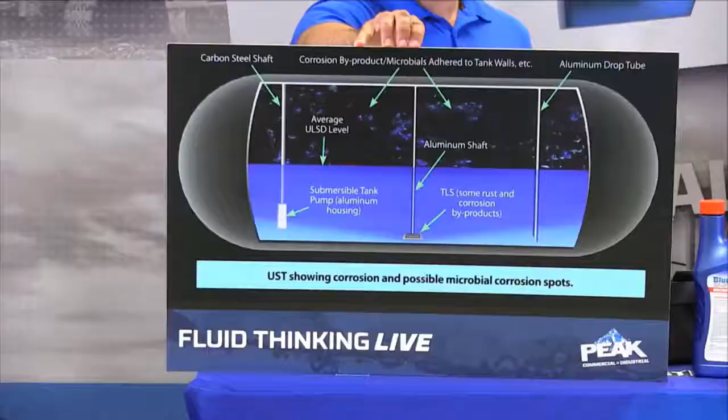Why don't we grab that picture of the tank, and our camera guy will focus in on this diagram, which shows an underground storage tank. You can see there's airspace in the black right above, and this is the fuel.

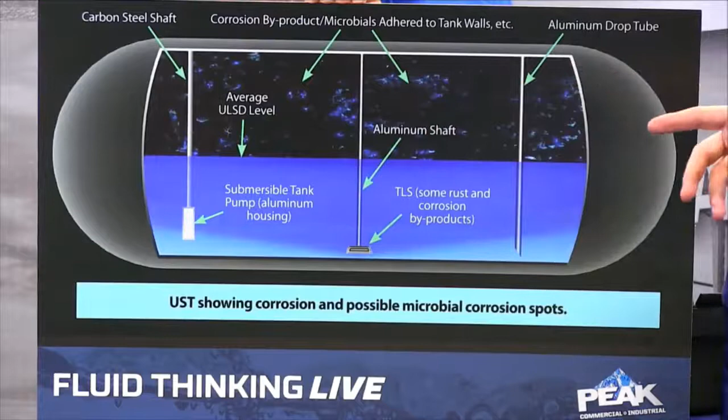Now, there's a lot of different places where water can enter the tank. It could come through the different fill points on an underground storage tank. If there's any seal leaks or cracks around there, that water can seep through as well.

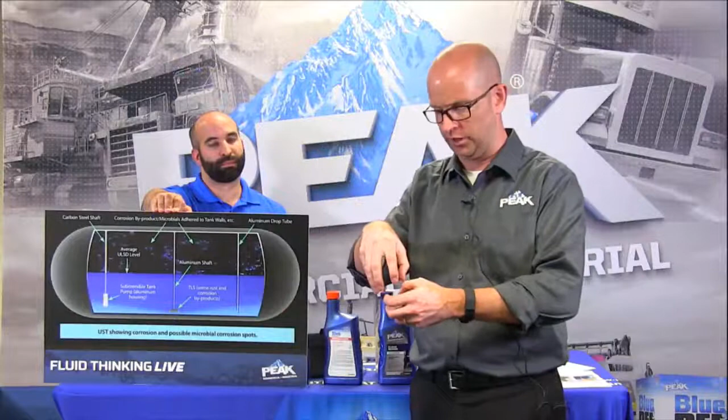We've had a customer at a fill point where there's a canister where the nozzle is, where people drop the fuel into the tank. Water will collect in that basin, so to speak, and before they drop the fuel, they'll pull the pin and all that water will drop right down into the tank. That's a physical way of water getting into the tank. You'll also see leaks around that fill point area.

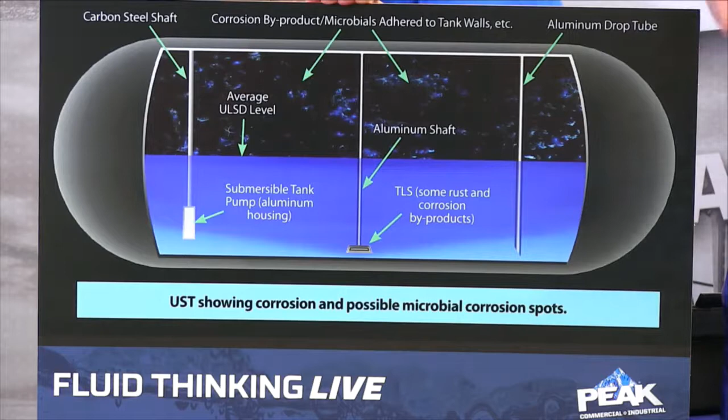There'll be leaks around the vent system as well. If the vent system is not managing the air properly, air might get into it where there might be water molecules. All of that can be ways of water getting into the tank.

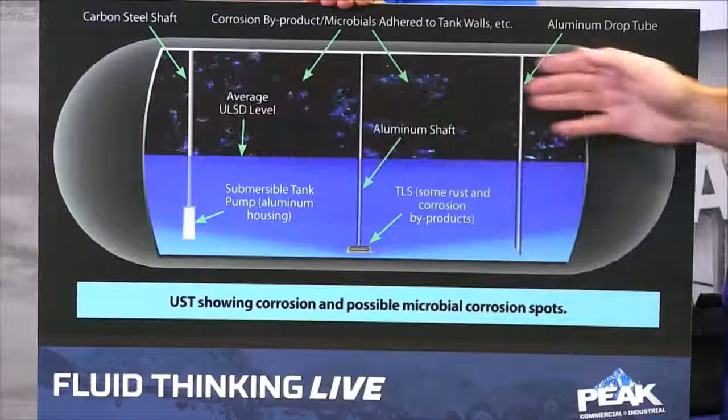And then the last one, which happens quite a bit with underground storage tanks or any kind of storage tank: if the temperature difference between the outside and inside is great enough, and you have a headspace of air sitting on top of the tank, condensation can form along the wall of the tank, which as it drips down can drip right into the fuel and eventually get right into the bottom of the tank. All of which are different ways that water can get into the system.

So why is this such a bad thing? Why is water in there so harmful? Water is great for you and me, right? But when water's in fuel, it can cause problems. It's great for us because we live with it, we live on it—water is important for life.

That's why it's become a bigger issue: water is an important piece of how microbes that are operating, living in the fuel or coming through the water, can form and start creating great colonies, great cities of bugs that live in the water layer.

And since it's an organism, it operates just like any organism—it will excrete things, it will excrete poo. Those deposits can get into the fuel system and start clogging up filters. That's one reason why microbes in water is bad.

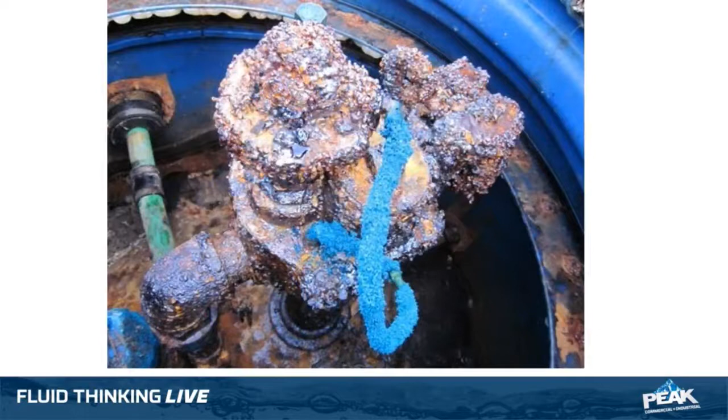Additionally, we can show some fantastic slides of different parts within the tank system itself. The first slide looks like some type of pump, probably a turbine pump head that sits in a canister. The air in the head space of the tank actually has acetic acid in it as well, and that's corrosion that wouldn't have happened normally. But it happens because there's so much microbes and acetic acid in the fuel tank itself. You get coral-like corrosion happening on this turbine pump head pipe.

And here's another example of an internal submersible pump that you can find in the tank. Once again, you can see the rust, all created by accelerated corrosion from the acetic acid. And there's a deeper dive into that same pump part as well.

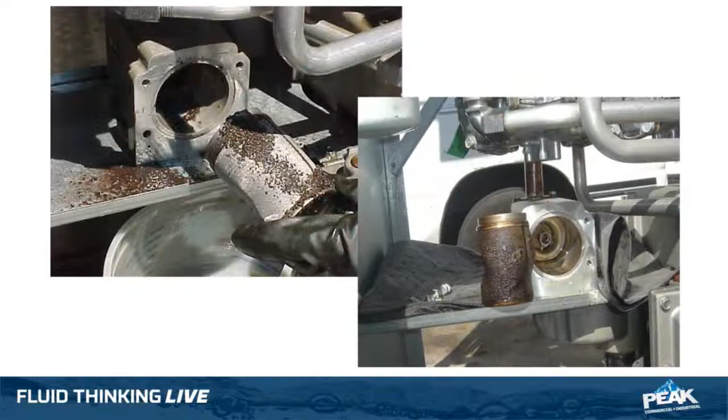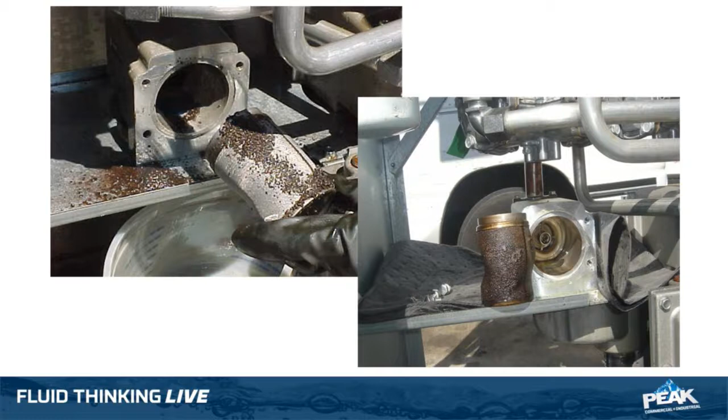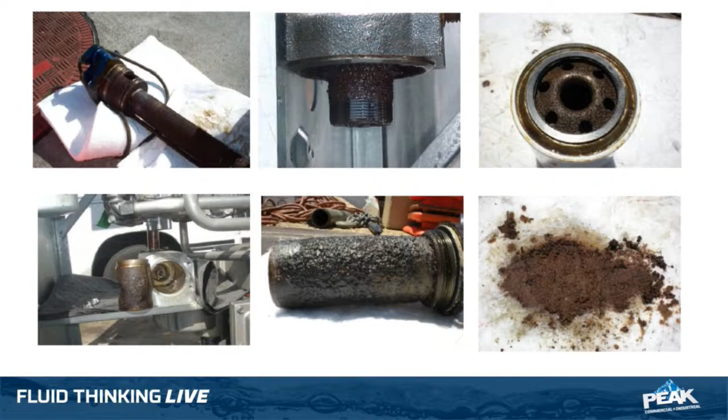If you move to the next slide, you can see the deposits can clog up filters. The upper right-hand corner shows a filter right by the meter itself where you're seeing all kinds of rusty-like material. That's all deposits forming from the fact that there's an unhealthy fuel system, an unhealthy fuel tank that a fleet's operating. And in the next slide, the rust can make it all the way into different parts, even within the engine itself. The acceleration and corrosion, all created by the acetic acids.

So we talked about the impact of this. The other thing that happens, that you might notice from the air, is like the smell of vinegar - very distinct. If you smell this at your tank, that means most likely there's a problem. The odor is another indicator that overtakes the normal fuel odor. A vinegar-like smell is an indication that there's something going on in the tank.

So I can see the effects of microbes, water, and I could smell the effects. If I look in a tank, how would I know there's water in it if it's going to settle to the bottom? Nearly all tanks will have some level of water - it's just a natural part of the system. The problem is if there's too much water, or if there are microbes in there, they thrive on that.

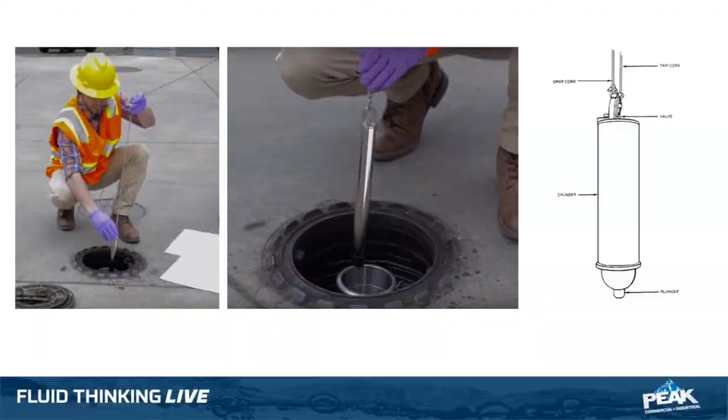At Peak, part of our overall program is that we have the ability to take samples of fuel and tell how much water is in it, how much gross water is at the bottom of the tank, and the level or types of different organisms that might be operating in the tank as well. It's always recommended that fleets do that on a regular basis. If they have a problem, or notice all the things we've talked about today, a bacon bomb is the first step to understanding what you're dealing with, because you can't open up the tank and see that there's water down there. That's why the bacon bomb is important.

A lot of fleets also have these systems. One of them is called Veeder-Root, which will alarm the fleet manager on a whole bunch of different things, including a water alarm if the water level gets too high. The problem is, as I said earlier, water is inevitably going to be in the tank. You're trying to minimize the amount of water. If it doesn't hit the alarm, you might still have a lot of water in there anyway.

That water could breed and allow colonies of bugs to thrive in the tank itself. Once you understand a little bit about what's happening in the fuel tank, if it's a gross problem, the fleet manager should contact a contractor to do a flush, or what they call in the industry a polishing, where they take a big hose into the tank, pull out all the liquid, separate the water and deposits, filter out anything that's formed, and then put the fuel back in, polishing or cleaning the fuel. Then they can get into more expensive activities where they actually go into the tank and clean it all out. That's what you do when you have a gross water problem.

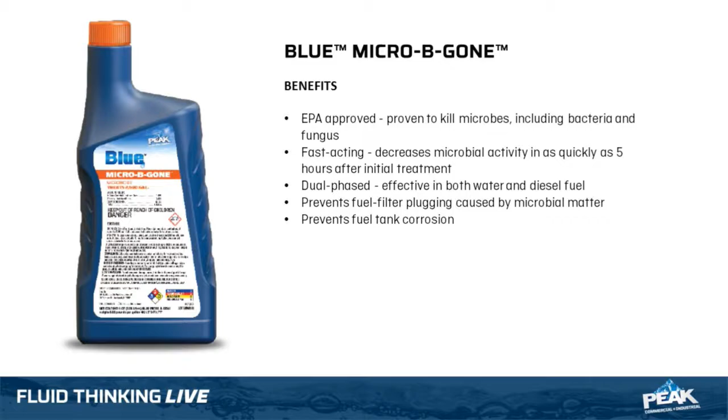Now folks, one thing that's very important: if you ever have a competitor say their product is a microbiocide and that it kills algae, kills bacteria, kills fungi - there's no such thing as algae in this context, because algae needs sunlight to operate. So if competitive products say they kill algae, they may not actually be the right product to buy, because they don't really understand that the problem is more about these types of organisms that don't need sunlight.

So we'll be offering our Micro-B-Gone starting this fall, and it's one of those products that from a maintenance perspective, customers should use twice a year. If they have a problem, they should use it as a shock treatment. When they do, it will kill everything in there, all the microbes.

Obviously that will fall into the fuel system and get picked up, filling up the filters a little bit. So they'll have to change out the filters, but they should be assured that the health of the fuel system is improved because it's killed a lot of microbes. So that's your shock treatment if you have a problem, or in a maintenance program, you should shock it probably twice a year.

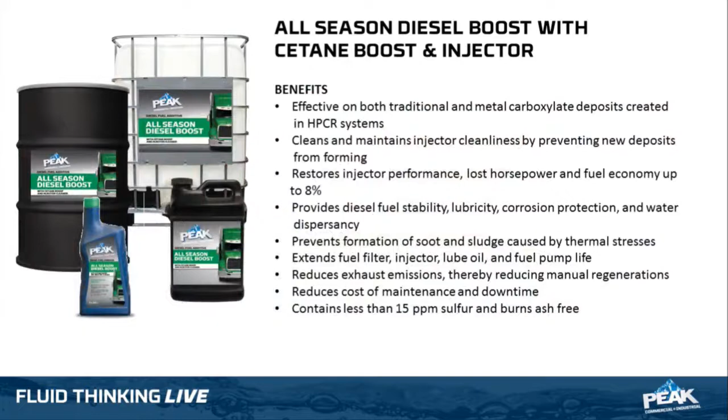Now, on a continuous basis, to date, Old World, we've offered Peak All-Season Diesel Boost, which has dispersants in it that do a really good job in taking the water molecules that are at the bottom of the tank and encapsulating them and then moving them out of the fuel system. It's not a gross water problem, but it's something that has done a good job in dispersing that water.

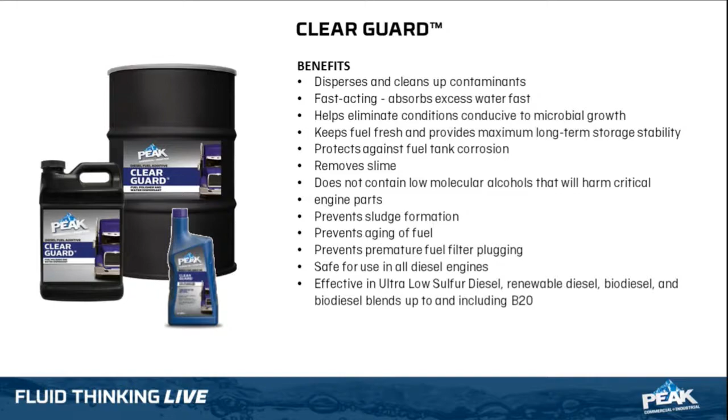But what's more important, this fall we'll be launching our first product that's specifically geared to managing tanks, called ClearGuard. It does an even better job of moving excess water out of the fuel system and getting it either combusted or filtered out through the truck's water filters, getting that water out of the tank itself. When you reduce the amount of water in the tank, you reduce the conditions that microbes can operate in.

These are going to be the products going forward that we're hoping our distributors will add on to their offer. So what keywords should we tune in on, or what questions should we be asking to uncover opportunities for Peak diesel fuel additives?

As I've talked about in the past, when we did our last Fluid Thinking Live event, I think the best way is to try to develop a conversation with the fleet manager, not just go right in and start talking about products, but start unpacking if there's a problem. A couple questions I always like to ask are: how's the health of their fuel system? Have they had water issues in the past? How often are they testing? If they're not testing much, hopefully that leads into a conversation about developing a program. Or if they are testing, understanding who they're using or what products they're using as a testing program.

Do they shock twice a year? That's all I'm hoping is those kind of open-ended questions can then lead into discussions about the product offer that Peak is providing through our distributors.

Would we key in at all on our Veeder alarms or anything like that? That's a great question. If they mention they're all of a sudden having lots of alarms going off from their Veeder root system, that there was a water issue, that's also a great indication that there's a problem with the health of their fuel system.